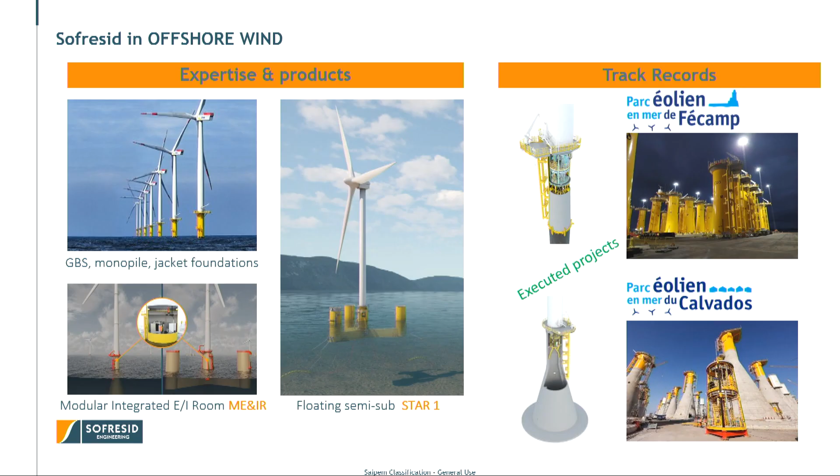We are also thinking of tomorrow with a modularized solution. This is a modularized solution of transition pieces, integrating all the electrical instrumentation equipment that we can be able to plug directly into the foundation. We talk about doing that 50, 60 times for the same field.

Now we will talk about what we can do for the hydrogen business and link it to the offshore business. So, Gwenaelle. Thank you, Stephane.

A word maybe, because I don't know if everyone here is really familiar with the hydrogen market, with the focus of what is being done, especially in the North Sea, because clearly this is where you will have the more active parties, I would say, working on offshore hydrogen.

What can be observed is that there are already some developments in Europe. It's a reality. We're not just talking about feasibility study or concepts. What can be observed is that you have some key players, especially in Netherlands, in Germany, Denmark, and in the UK, with a clear upscaling of the developments that will occur around 2030.

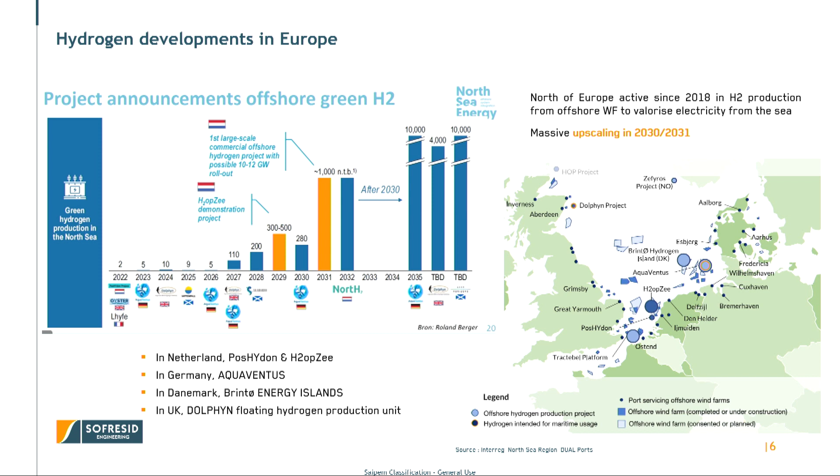We can really see in the figures that you start from a pilot and then you start having some commercial developments that will be occurring in less than 10 years now in the north of Europe.

A word maybe about the value chain of hydrogen. How do you produce it and why do you produce it, basically? So clearly you need to start from its production. That can be through different vectors.

So here we are mainly focusing on the renewable hydrogen that will be made from water electrolysis. So to do so, you will first obviously need to have a treatment of the water, especially if you are considering using seawater, for which you need to demineralize the water before you may use it in the electrolyzer.

Some conversion also in terms of electricity, especially when you are working with a renewable that is intermittent. So that's something for which you definitely need to do some conversion and some balance plant, basically, and then only the electrolysis. I put a few other examples also of what can be done through the biomass or valorization of the natural gas, then with capture of CO2 in order to limit your impact on the environment, in which case the hydrogen is not considered as renewable or green, but more like what we call blue.

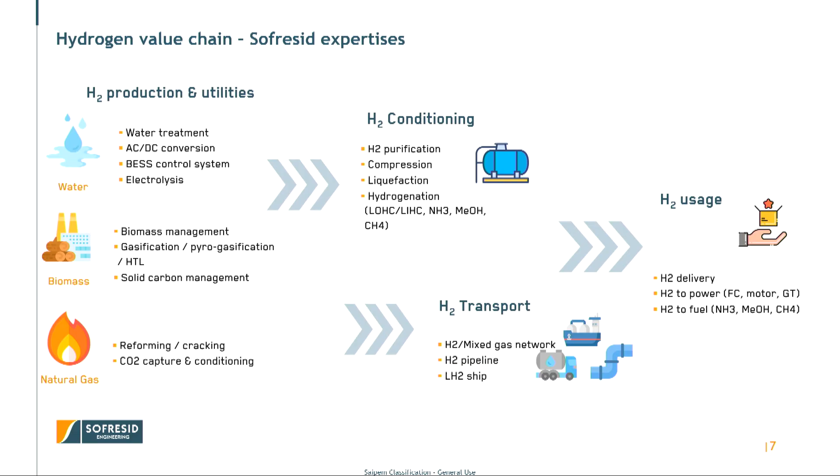Once you've produced your hydrogen, generally you don't leave it as it is. You probably need to store it, in which case you will have to compress it if you want to keep it as a gas. Or you can consider having different storage means, because the volume it represents is pretty massive, either through liquefaction or using some hydrogenation on a hydrogen carrier, or just converting it to other fuels, such as methanol or ammonia.

Then you'll obviously need to distribute your hydrogen, either by direct transport, pipeline, or ship, if you want to export it. And when it comes to the use, you may convert it to another fuel, or use it to convert it through fuel cells in order to feed, for instance, boats.

I'll go maybe more in detail of what SOFRESID is doing with this mapping that shows the various solutions that have been developed. Basically what you can see is that from the electricity we may produce hydrogen either on a centralized solution, if you want to have only one single hub for the hydrogen production.

You may elect to install it on your wind farm directly to have a decentralized solution. And then when it comes to the use, what you will do is either export it to the shore, or maybe consider having it as a fuel for local distribution, especially for maintenance vessels that will be operating in the area of the wind farms.

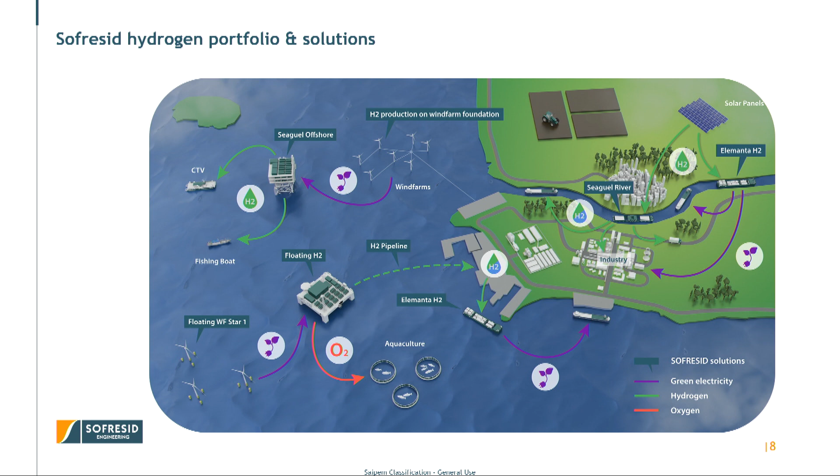When it comes to use, we also developed other concepts: the barge Elemanta, that is a power conversion barge, so from hydrogen to electricity, and Seaguel River, that is a refueling station distributing also the hydrogen. So all these concepts will be more detailed, starting from the production.

Maybe, Stephane, if you want to have a word about what we are doing onshore? It's important because when we talk about the perspective of the hydrogen, we could think that this will be for tomorrow. Will it be for the mobility? Will it be for the sustainable air fuel? We will see tomorrow. But what is sure is that today we need hydrogen.

All the industry are needing hydrogen, either for the fertilizer, for the refinery, and also to produce e-fuel. So, who is leading the path? With the first production unit coming next year, is the industry. So there's two examples here of project that we are conducting engineering for.

First is this unit producing 50 megawatts of hydrogen, decarbonized hydrogen, to produce and decarbonize the fertilizer. So we are just replacing the gray hydrogen with green hydrogen. For that, we are conducting basic engineering, developing pre-FEED, CapEx evaluation, and we can hope that this project will start the first construction next year.

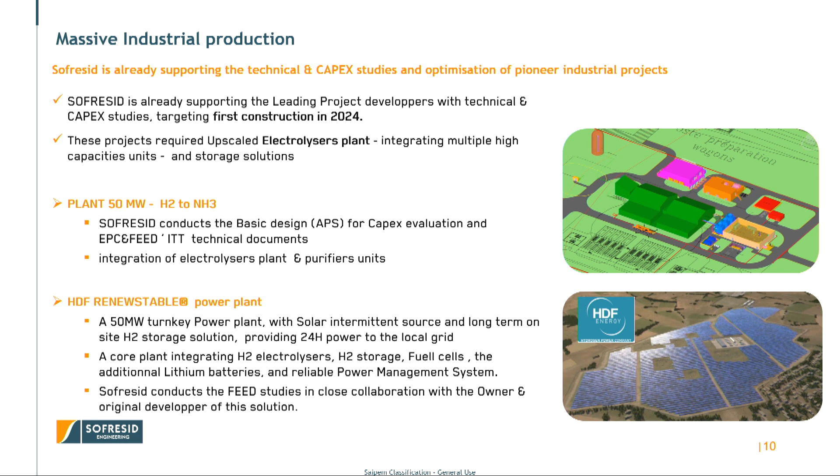The second example is this very smart power plant proposed by Hydrogène de France, HDF. They have a smart solution of power plant. The solar farm is connected to the grid, providing power in the day, but also dedicating a part of this production to produce hydrogen during the day, storing it in a quite large storage area, and giving back to the grid during the night with fuel cell and also an additional battery storage.

So this is for tomorrow, next year. They already started a plant, a well-known plant in Guyana. So you can see we are talking about 50 megawatts. Today we are already starting to offer and work for production of 100 megawatts. And we all know that tomorrow the need for e-methanol and sustainable air fuel will require maybe 100, 200, 500 megawatts. There's already some plants like that worldwide. So we hope that there will be, maybe in 2-3 years, some mega factory of methanol in France.

So for that, we are conducting the FEED studies and procurement activities.

Thank you, Stephane. A word about the roadmap we've defined with respect to hydrogen production developments. What we've observed clearly is that there is a key target to be able to propose commercial solutions by 2030 if we want to keep up with the pace already being paved in the North Sea. If we want to be ready, we need to work in parallel on two approaches. The first being to have pilots to qualify the solutions, to make sure they work in an offshore environment. The second being to prepare for commercial applications by conducting concept evaluation and feasibility studies.

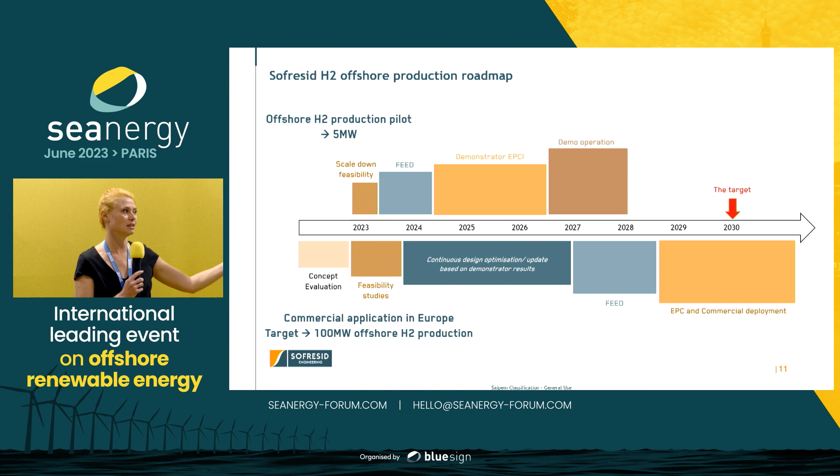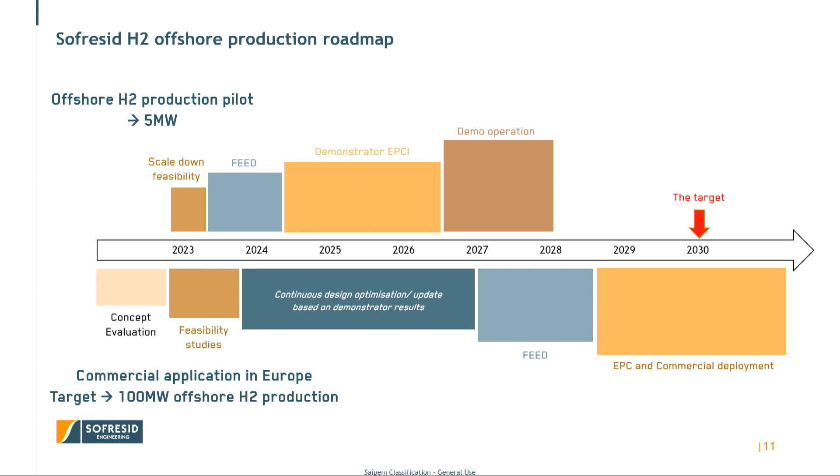We truly believe it's important to link them both, so lessons learned from the demonstrator can be integrated into the design conducted by 2029, if we want deployment by 2030-2031. But also to start conducting feasibility studies for the large scale even now, if we really want to be ready in time.

With this in mind, we focus our development on two key points. First, having demonstrators or smaller projects to start the business of offshore hydrogen. Secondly, starting to consider concepts that would allow massive upscaling, projects above 100 megawatts for hydrogen production.

So one of the first developments, the most recent one actually, was integration of hydrogen production capacity on the floater. In that case it was a Star One, since it's developed by Saipem, I'd say it was a starting point. It was the most straightforward for us because we knew exactly what the structure was like, what space we had. What we've done is integrate all the hydrogen equipment on one of the external columns that was empty, where we had some space. Here I've got an animation that explains in more detail how it was made.

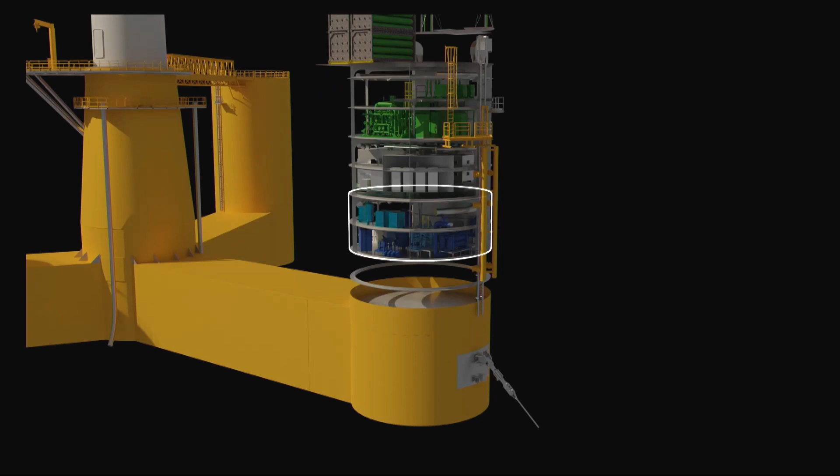Basically what you have is 3 floors. The first one dedicated to pumping and treating the seawater. The second one dedicated to electrical conversion. And the last one meant for all the process, with a 5 megawatt electrolysis capacity through PEM.

What we've done as well is include some storage facilities. We've considered 1 ton in the present case, with the idea of being able to discharge the hydrogen through a buoy to vessels that could then work with fuel cells. The first application being really for CTVs and SOVs ensuring maintenance and inspection on the wind farm, so that we remain in the field. What we've developed is meant to be used directly there.

On mid-scale development, we've also considered a centralized approach in order to have more production capacity on a single structure, with either new or repurposed facilities, because we could definitely use previous oil and gas facilities already existing, especially in the North Sea, with some marinization and integration of equipment, either on a fixed platform or on a floating barge or vessel.

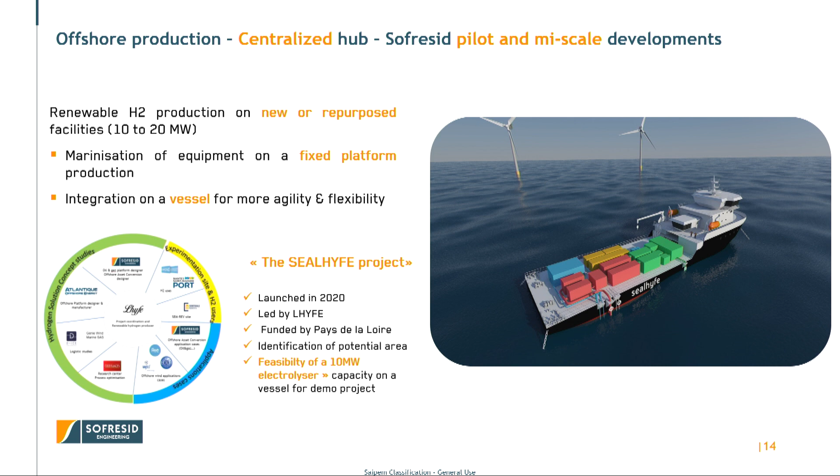Stephane, maybe you want to say a word about the SEALHYFE project. It's a very nice project we developed with a lot of partners, mainly led by Lhyfe and funded by Pays de la Loire. In that picture you can see a solution of 10 megawatt floating solution, but we explored a lot of other solutions, and also the possibility to recover existing assets of the offshore oil business, mainly for the North Sea. A very nice project, and we need to do that always in partnership. One of the final conclusions was also to prepare for a demonstrator with a 10 megawatt capacity on a barge.

Now, like I said, we are also thinking about the future and about how massive production could be and how we could adapt to that. So at SOFRESID we have strong naval and stability expertise, deriving mainly from oil and gas. We decided to use this expertise to design and consider different types of floating structures or fixed platforms, based on the size of equipment and the storage capacities that could be needed.

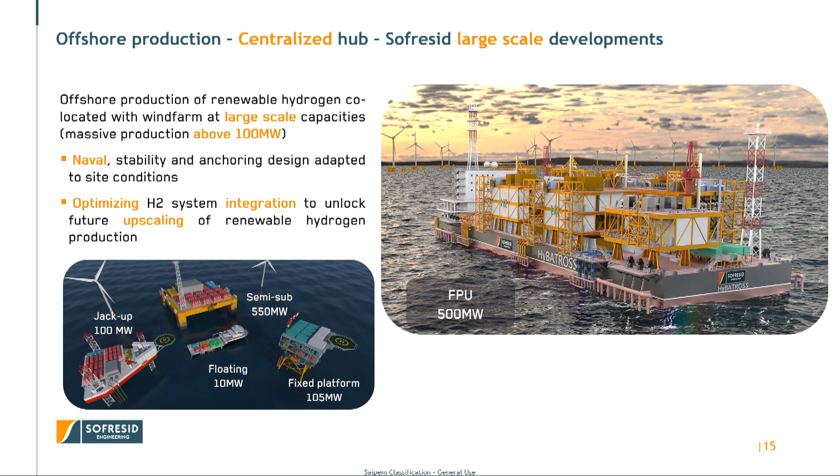Obviously, depending on the sea state, you will have different conclusions. But basically, we've worked on concepts in more detail: a semi-sub that could go up to 550 megawatts, and an FPU, where we don't have storage capacity because we've considered export directly from the sea to shore through a pipeline.

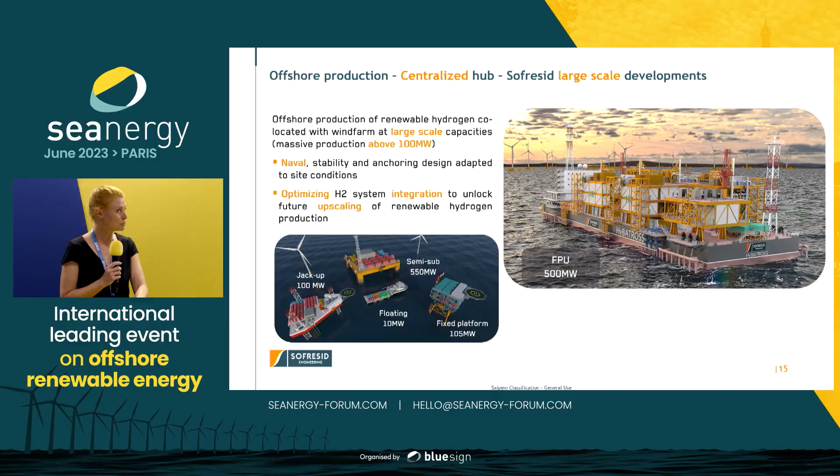A bit more detail maybe about this last concept. We've called it Hybatross. It's obviously co-located with wind farms, and what we've done is have 5 modules of 100 megawatts each.

So it's a solution that could be adapted also to lower production capacity. If you want to go down to 100 or 200, you just need fewer of these production modules. You also have a small storage capacity here for local distribution afterwards, but most of the production is meant to be exported to shore.

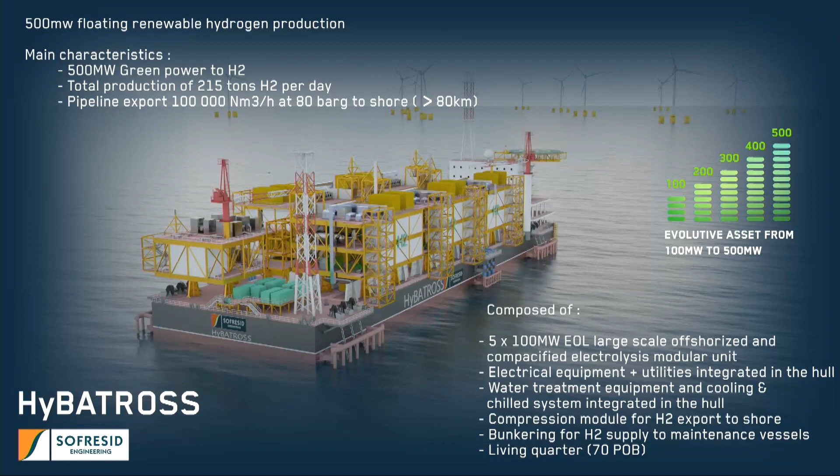In the present case, we also considered compression for the export, up to 80 bars, so that it could be adapted to the gas network inland.

This concept is something we've developed internally. But in the future, we'll collaborate with a partner, EMEC in Scotland, to do a feasibility study together and see how it could be adapted in the North Sea context.

Yeah, it's just a word. It seems very futuristic. It's a concept, an exercise.

But if you look better at the possibility of that, it could be offshore, but it could also be built in a remote area and then installed in a harbor. So you can put it in the harbor and get the power from the field. You can put it where you want.

And already you can see that some developments of that are appearing in Germany, probably in Poland too. So our friends in the North Sea are already thinking about that and will propose a solution in the coming years.

Thank you for the clarifications. Now, going further in the distribution chain, we have a few concepts.

So here I've gathered them to go a bit more quickly about a refueling station. It's a platform that has some hydrogen production capacity, storage, and can distribute the hydrogen as a bunkering station, basically. This concept we've called Seaguel. It has a kind of sister, a barge for more sheltered environments.

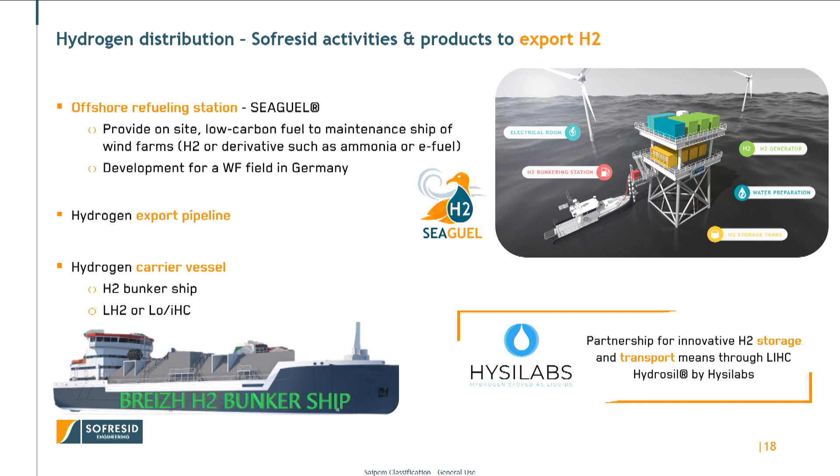To support us in this development, and also to work a lot on the storage and transport capacities, we have a partnership with a laboratory called Hysilabs that has developed a liquid organic hydrogen carrier called Hydrosil, for which we are supporting them in the engineering of the upscaling of their solution, and in the marinization of their means.

I don't know, Stephane, if you want to detail a bit more about the possibility of hydrogen for the naval business, marine mobility.

We are already working on service boats, passenger boats, because a lot of local areas want their hydrogen ship. But we are also working on crew transfer vessels that will help offshore wind fields be greener, and it's possible. The power is there. The hydrogen is maybe not yet there, but the solution is viable.

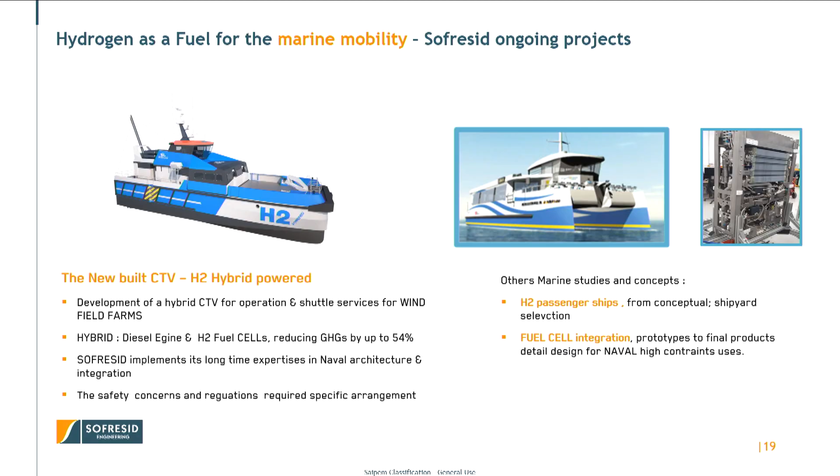A word about Elementa. It's a power barge that is really meant as a first application to do cold ironing. That is to say, we produce electricity so that vessels at the quay can cut their auxiliary engines, which are mainly diesel at the moment, and use electricity instead.

So it's a support for harbors that do not necessarily have a strong connection to the grid, or fixed infrastructure to do such electrification. It's more of a transition solution, or to answer peaks where the grid might not need to deliver strong energy for a very long time. It could also be applied to deliver electricity to yards if they are equipped electrically.

The purpose is quite simple. It's just a hydrogen power barge providing power in a remote area. But when we talk about remote areas, there's a lot of remote area also in major ports worldwide where you don't have electrical power at the berth. So this is providing that power. It's just a 2 megawatt power for the time being.

The importance of working in consortium: we are working with Hydrogène de France and Rubis Terminal, and we have been granted support from ADEME, Corimer, and Pôle Mer Bretagne Atlantique. This project is aimed to start in the coming months for an application at the Rubis Terminal in Rouen. So we are ready to start that in the coming months.

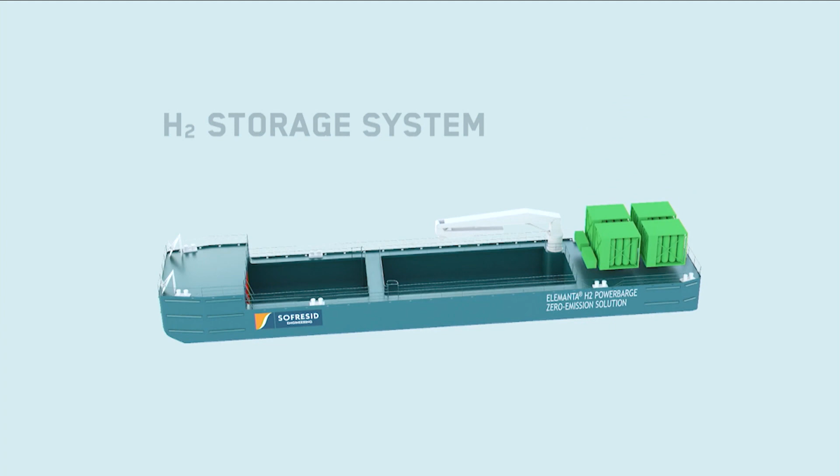Okay, well, the shape of the barge is probably not the final one. This was the first shape for river purposes. So we can also think about a simple pontoon for yard application.

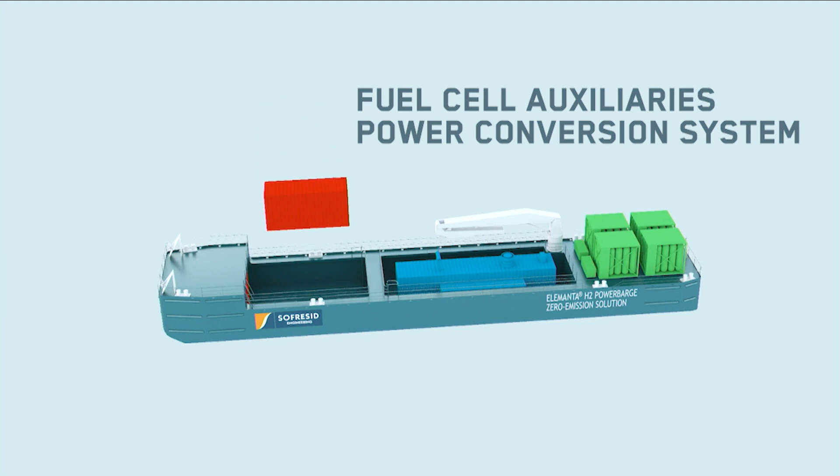The gain of the barge is that you don't need to store the hydrogen on the berth, with all the required permitting that you need. So all the hydrogen storage is on the barge. Then, of course, you've got the fuel cell and the power management system.

It's quite simple, but when you talk about something simple, it should be cheap, because at the end, the operator of that barge is selling the green electricity.

Now finally, because all these topics clearly are connected to how we could guide a territory, a maritime territory, in order to decrease the carbon footprint in general, I extended the perspective a bit by talking not only about renewable hydrogen, but also about all the services that can be made in order to decrease the carbon footprint of a harbor.

At the moment in France, we have some ZIBAC developments that have been announced. The two first being in Dunkirk with DKarbonation, and the second in Syrius in Fos-sur-Mer.

Other cities now are also candidates to have such developments, with really the development of what is called industrial ecology. That is really meant to valorize as much as possible the waste energy, the byproducts, and so on, and to create a whole ecosystem where basically everything is reused, with no loss, or at least as little loss as possible.